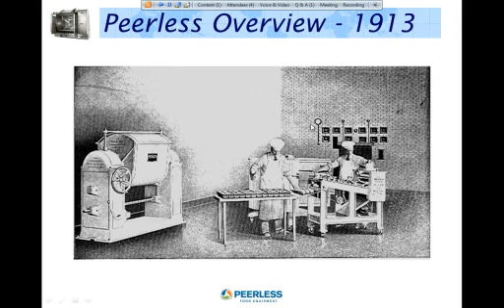Our equipment has changed over the past 100 years. If you're still running the mixer to the left here, congratulations, you have a great maintenance program, but you need to catch up a bit. The design and technology of our equipment has increased considerably over the last 15 years, and the safety standards are constantly being updated. Drive belts have become the new standard over chains, and if you don't have a frequency drive on your mixer, it's becoming outdated quicker than you realize.

With these changes, your maintenance practices will need to be adjusted. Having a Peerless expert on site allows customers to understand and update these practices. It also creates an opportunity to reinforce the training that was originally provided with your equipment.

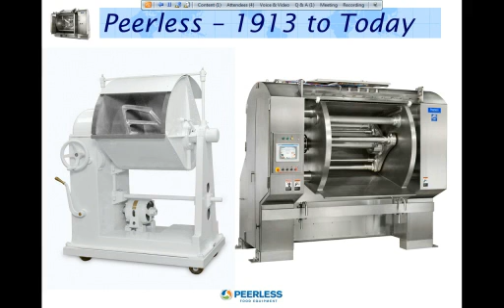Our on-site experts can also use their experience and knowledge to predict and possibly prevent future major mechanical breakdowns, which give you the ability to be more proactive with maintenance schedules. That goes a long way when today's production schedules allow little room for maintenance required to prevent costly downtimes. We will also work with your team to ensure that all safety devices are working as originally designed.

Preventative versus predictive maintenance. Is your current maintenance program reactive or proactive? Most maintenance programs in the baking industry are designed to be more proactive, but with today's production demands, a lot of the scheduled maintenance gets pushed back and sometimes forgotten. This trend will compound over time, and the maintenance team will find that they are being more reactive than proactive. The fact that most maintenance teams seem to be understaffed only adds to this issue.

Can a Peerless PM program help you reduce costly downtimes? The answer is yes. Our experts can determine the current status of your Peerless equipment. We know where to look for the wear points and the problems that are common. We understand the differences in the models and the years manufactured. After all, we built the equipment.

We also look at the history of your machine. We know what upgrades have been added, what parts have been ordered, and what services have been done in the last years. In some cases, the services or parts not ordered give us clues where to look for issues.

Along with the PM contract, there's a lot of benefits that you might not realize. These include reduced rates on parts and discounted services. Plus, you receive priority if emergency services are requested.

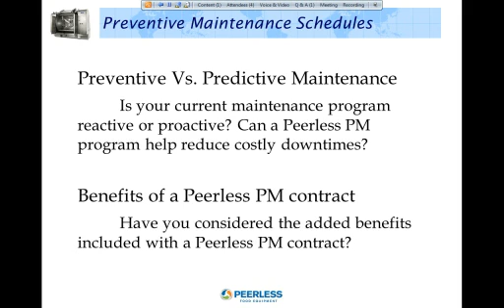Preventative maintenance is generally carried out to prolong the useful working life of machines and is generally based on past experience or manufacturer's recommendation. Wear and tear are two occurrences that nobody can avoid. However well carried out preventative maintenance, your equipment is going to fail someday, but before that, ample warning signs are usually given. These signs are in the form of noise, vibration, or temperature. This is where predictive maintenance comes in.

Basing again on past experience or techniques such as analysis of oil or measurement of wear and so on, mechanics and engineers are able to schedule a shutdown and do repairs before a breakdown that affects your production schedule. Depending on the techniques used, we are often able to predict quite accurately the problem parts and have standby replacements so as to minimize downtime. We can almost guess what kind of services will be required on a mixer from the 90s.

Even if preventative maintenance is being done, there is still wear occurring. Predictive maintenance is a part of preventive maintenance, actually a technique used in preventative maintenance. All are done to prevent unforeseen shutdowns and maximize the working life of machines. Bearings, trunnion rings, bowls, shafts, agitators, belts, chains, motors, reducers, and sprockets are all major parts that will eventually fail. These require detailed inspections, typically not done on regular PMs.

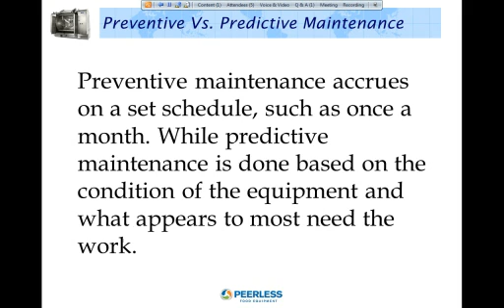Your mechanic may be adding grease every week as required, but may fail to understand where the grease is actually going. A lot of our mixers have central lubrication points located outside the mixer that allows for lubrication without opening the end doors. This is convenient but not always a good way to maintain equipment. I mean, if your mechanic's not opening up the end doors and looking at the tilt mechanisms and the drive components, surprises are going to happen. None of them good.

Another example is automatic lubrication systems. Going in and filling the automatic reservoir is required, but we want your mechanics to inspect the grease lines and look for failures in the lubrication system while they're inside. When was your motor to reducer coupling last inspected? If it's been longer than a month, you're behind schedule and trending towards reactive maintenance.

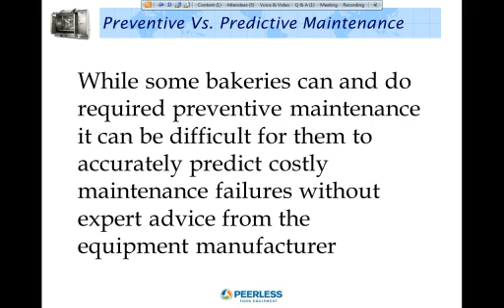A good inspection will require the equipment to be viewed under load. While it's true we cannot interrupt production once a problem is identified, running production tells us a lot about your machine that is hidden when operating empty. Examples are bowl tilting and agitator shaft movement, unusual noises and temperature variations.

Some customers will call up and schedule inspections for down days, which is fine and allows us to review their equipment in detail. But a good inspection will require the machine to be visualized under production. If I'm doing my job correctly, I want to see it under load if possible.

Once an inspection is completed, our technicians file a detailed report listing work completed, any notes they felt were important, parts required, and action items that need to be completed. Half the battle is knowing what needs to be done.

Costly maintenance failures that may be difficult to predict. Bearing heads and trunnion rings. A dry bearing head is a visual indication of a serious lubrication issue. It may be as simple as a sanitation washdown issue or a bigger issue involving failed lubrication system or clogged or broken grease lines.

Hydraulic power units are mostly ignored by maintenance as long as they work. They are a contained system that runs behind the scenes. Oil level and filter must be maintained on these. Gear reducers seldom fail without some indication or signs.

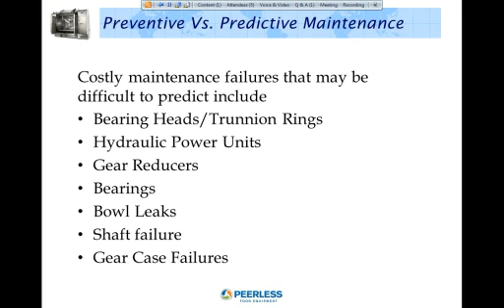Preventative maintenance is required to accurately predict and prevent costly maintenance failures. Here are some examples. Trunnion rings. Last year, we replaced over 10 sets of mixer trunnion rings. This is a costly service that requires the bowl to be removed from the mixer and the frame rebuilt. All of these could have been prevented with our Peerless PM plan.

Refilling lost hydraulic fluid is required at times, but the key is identifying and repairing a leak, and that will in turn prevent damages. Gear case backlash, we talked about that. You can monitor that and record the backlash and then schedule the rebuild. On dividers, I see customers wasting a lot of product due to worn parts. These parts should be replaced for that reason alone. Once a worn part breaks, there's usually more damage, and all that could have been prevented.

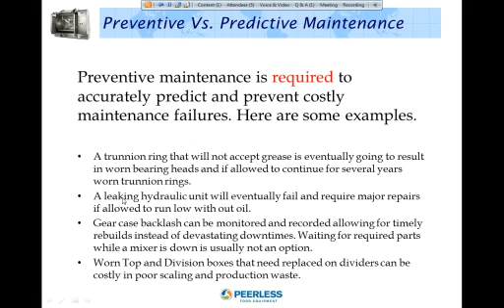While participating in a Peerless PM contract cannot eliminate all failures, it can be a valid tool to help predict major failures before they occur. Preventing one major failure can easily pay for a complete year of PM services. During a recent visit to a customer, we discovered they were forcing water into the bearing cavities during washdowns. This is a common issue with today's power washers that was easily corrected with training. Had this condition been allowed to continue, it would have resulted in costly downtime and emergency bearing repairs.

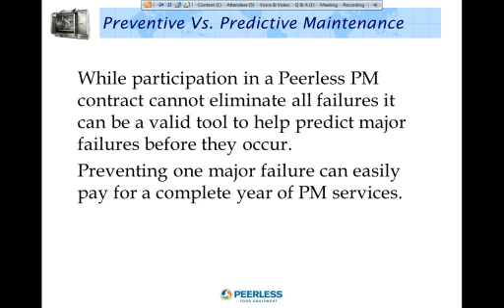We can determine if shaft seals are being properly lubricated and sanitized. A damaged shaft will not seal, and replacing one is costly. Parts, labor, and downtime must be considered. In addition to having a Peerless expert on site to help review your equipment, consider these added advantages. Our customers with PM contracts receive priority when it comes to emergency services. I can think of several instances where we were able to mobilize services within hours when requested by one of our PM contracted customers.

Discount service and parts. Customers also receive a 20% discount on required services identified during our PM process. 20% on a big service like a bearing change or a bowl replacement is substantial. Our PM contract customers receive 5% discounts on parts generated from our PM visits. This works hand in hand with predictive maintenance and scheduling proactive maintenance.

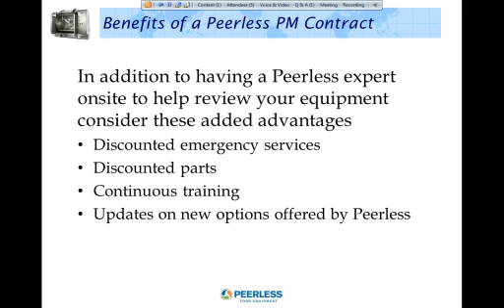Continuous training. Some of our customers experience large turnovers in their maintenance teams. With these experienced personnel leaving, a lot of reinforcement training is required. Having the expert work directly with them is a great way to teach them what to look for. Updates on new options offered by Peerless. Peerless technicians travel all over the world and are familiar with what is currently trending in the baking industry. They can often advise customers on options they may not even be aware exist. Shaft seals, flour gates, cooling options, dough handling options, all have been updated in the last few years.

Prior to a PM visit, our customers are contacted and advised to stock parts required during our PM visit. This helps ensure the parts are installed while we're on site versus getting a list of parts that need to be added later. We can often identify what parts are not being stocked and can advise if stocked items are valid. Customers update equipment, but they seldom reduce obsolete inventory.

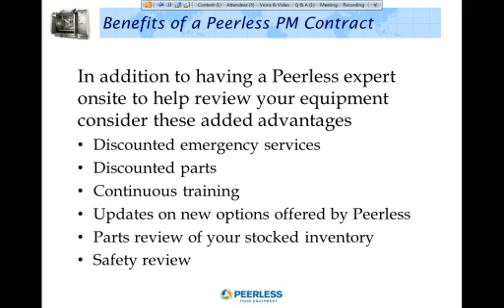Safety review. Peerless technicians will advise customers if Peerless equipment is operated in an unsafe condition. This will reduce accidents and costly liability. In the heat of battle to get equipment running, sometimes safety switches are bypassed and not returned to the safety circuit. We understand how the original safeties were meant to operate and will correct or report any issues with them.

Included in the Preventative Maintenance Program, Peerless Food Equipment will provide the following services. A typical PM visit with the customer will include the following.

We'll conduct an informal opening meeting to discuss a plan for service, and provide the correct person familiar with the equipment. Sometimes schedules get moved at the last minute, and that could be our fault or your fault, but we'll work with you always to get it done on time.

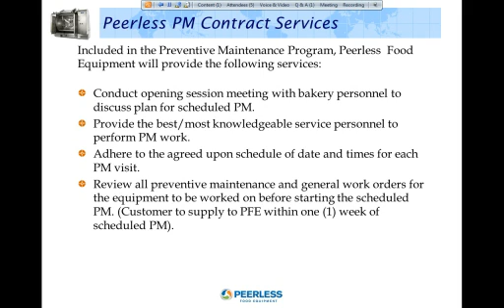Reviewing preventative maintenance work will give the technician a start point and an idea where best to concentrate his efforts while on site.

We compile a list of issues to be investigated during PM, based on PM work. This lists issues and focuses the technician's efforts towards the problem areas. This is a big part of the PM.

You supplying the correct personnel, we're going to work with your bakery personnel to complete the scheduled PM. This is a big part of the PM. Your supplying the correct personnel will ensure the best results.

We'll review issues and create priorities with the maintenance manager for work to be completed. Prioritizing the work orders on needed repairs will continue the efforts once we have left.

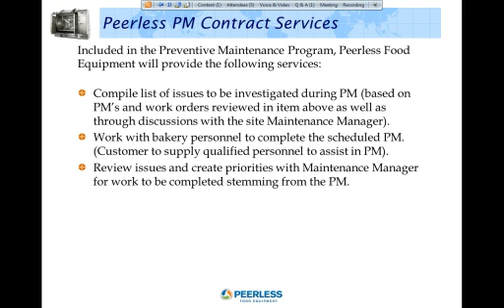Review parts inventory with the maintenance manager. Inventory of parts will keep the wear parts on the shelf. Provide training and machine operating review with personnel from all three shifts. Continuous training will help replace knowledge lost from turnovers.

We'll concentrate on completion of the scheduled PM. What we mean by that is sometimes during a PM we see work that has to be done, and we can get bogged down in that work and not complete the PM. So sometimes we have to pick and choose whether to just write up a work order or to dive in and complete the repair. We have to balance the two.

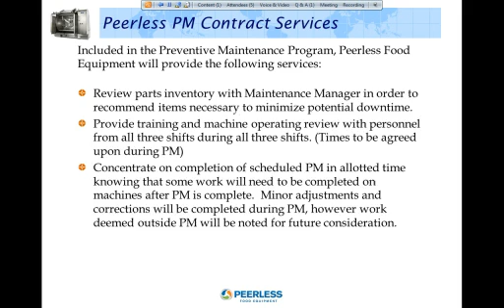If we can't complete the work, we'll write them down, note them, and recommend them for work orders. We'll conduct a closeout meeting and review the results of the PM, and note all major findings. After we return home, we'll send a detailed trip report and issue this to the maintenance manager within a week.

We'll follow up with the maintenance manager. The technician will follow up with a phone call or an email to check for any other issues. And remember, all parts ordered as a result of the PM visit are reduced by 5%, and there's a 20% discount on all Peerless food equipment standard hourly rates.

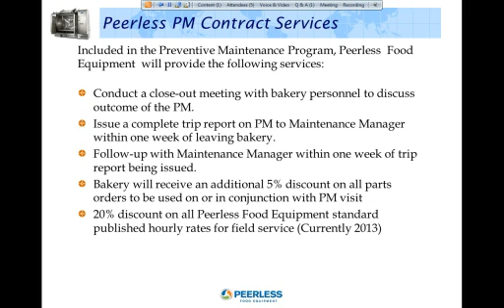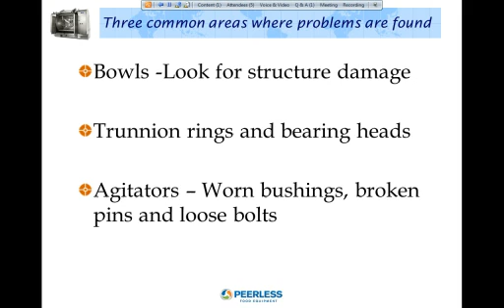Now I want to talk about some areas of the mixers to look for problems. Three common areas where problems are found are your bowls, your trunnion rings and bearing heads, and your agitators. We're going to go through each one in detail, starting with the bowls.

Bowls. You want to look for structure damage on your bowls. Most high-speed bread mixing bowls in the 10 to 20 year age range are going to show evidence of structure damage. Sweet dough mixers tend to hold up a lot better because of what you mix and the lower speeds they mix at.

On all bowls, you want to check all corners and weld seams for cracks. Check around the bowl lips for cracks. Check the bowl spacers and support tubes at the welds. Check the welds around the cold bars, and check your jacket wrapper sheets for cracks.

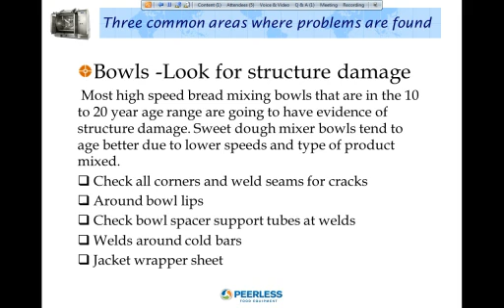Here we've got a couple of photos that show some major structure damage on some bowls. Here's the side of a bowl that's showing a major fracture in it.

Sometimes you'd think they'd be easy to see, and sometimes we point them out to customers and they're shocked that they exist. This one's on the outside base plate, and you can see that this crack goes all the way through. This was at a recent inspection on a customer, and when that mixer was under production, I could feel that crack opening and closing. So they really had worked their bowl over good.

They're going to need some major repairs on that bowl, if not a bowl replacement.

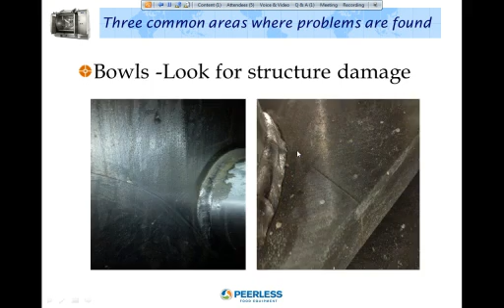Trunnion rings and bearing heads. Here's a bearing head we pulled out of a mixer that was neglected. You can see where the bowl's tilted up and down so many times it's worn a groove in it right up to the mounting bolts. This wasn't necessary. If a lubrication system fails, it needs to be addressed right away.

If your lubrication system's not corrected, this is the kind of wear you're going to receive if you continue to run your mixer. Because they failed to recognize this, it involved replacing the trunnion rings, which is basically removing the bowl and rebuilding the framework.

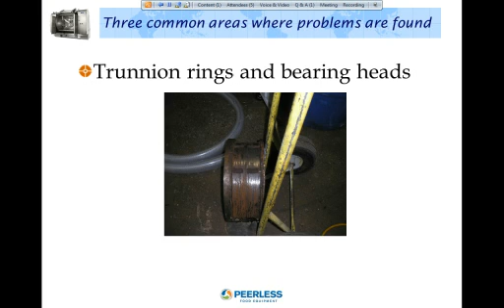Agitators and worn agitators. Worn bushings, broken pins, and loose bolts are common in agitators. You want to go in there and inspect and torque your bolts every month and replace your bolts every year.

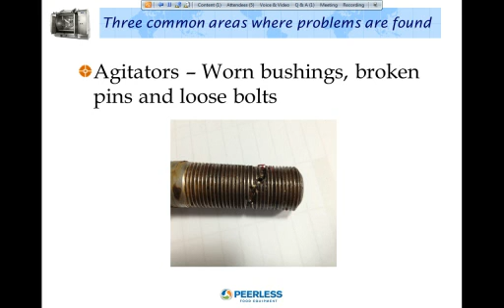In this example here, this bolt has been stretched so much because somebody was improperly torquing it. It's a wonder this bolt didn't come out into the product and cause a serious production or product loss.

Please consider the benefits of a Peerless PM contract. Our service department will be glad to quote a custom PM plan designed for your existing and future equipment.

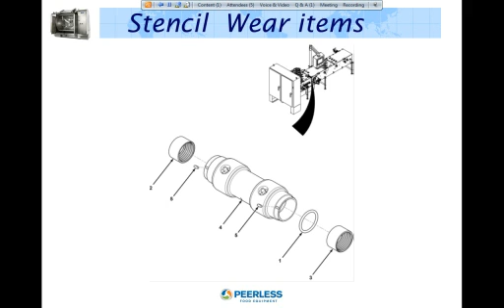Peerless sandwich cleaner. Every cleaning cycle: 1. Disassemble and inspect the stencil assembly for any cracks, worn out seals, wear on the center O-ring. The bronze bushings on the driver and idler hubs should be measured for wear.

1A. Worn helical seals should be replaced as soon as possible because cream will leak out of the stencil ends and into the driver and idler hubs. B. Replace center O-ring at first sign of wear to ensure proper cream balance between lanes.

C. Check the oil seals in the driver and idler hubs for wear. D. Measure the bronze bushings in the driver hub every 90 days to make sure the ID is not out of tolerance. Since the stencil assembly is suspended from these, it is important to replace them when they are out of tolerance to prevent premature seal wear and damage.

2. After washing and drying the stencil assembly, oil the stencil tube, the bronze bushings and seals, and reassemble. Put oil in the threaded oil ports in the stencil hubs. 3. Check cutoff wires for wear and proper tension.

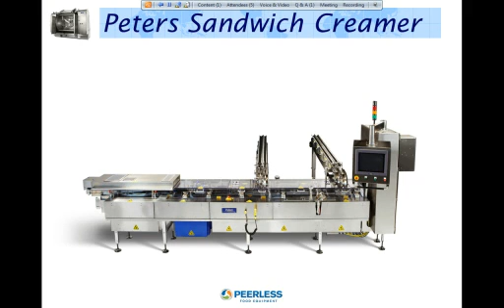Every cleaning cycle, check overhead pin chains for slack and tighten if required. Check overhead pin chains for bent pins and straighten if needed. Check the drive chains under the top cover for slack and tighten if needed. Check spring plungers in the driver hub for wear and replace as needed. Check the drive chains between the PT and QS stacker for slack and tighten as needed.

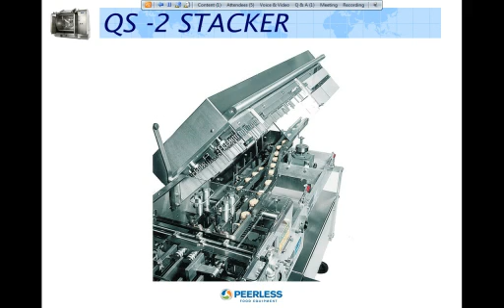QS2 bottom pin chain, every cleaning cycle. Check lower pin chain for slack and tighten if necessary. Inspect the pins for straightness. Check the timing between the lower pin and the upper pin.

They must be in line with each other at the point where the top cookie rail is over the bottom cookie rail. The upper pusher pin should never be in front of the lower pin, or it will crush the cookie. It can be behind, for example, as much as 9 millimeters, so when the lower pin releases the cookie, it will fall back on the top pin.

Oil all chains, and use food grade oil on pin chains. Inspect all chains for wear.

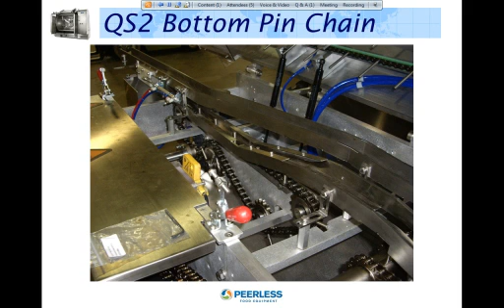Peters creamer hopper. At every cleaning cycle, inspect bottom of tank for leaks. Inspect center cap seals that cover the agitator shaft. Replace O-ring and seals if leaks are detected.

Waukesha pump. The pump must be disassembled and washed. All seals and O-rings inspected and replaced if worn. Refer to the Waukesha pump operation, maintenance, and parts list for removal of the fluid head for cleaning.

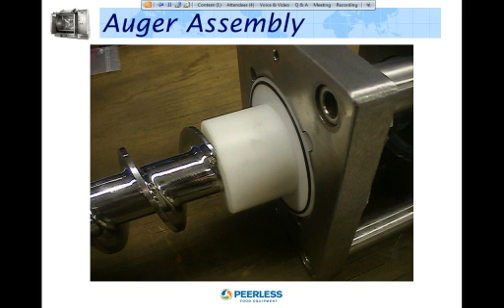Auger assembly. Every cleaning cycle, pull the auger assembly from the hopper. Remove the 4 bolts that keep the auger in place and pull the auger straight out, keeping it as level and on center as possible. After cleaning, inspect the auger helix, silicone auger seal, and O-ring for any damage. Replace worn components as needed or when leaking.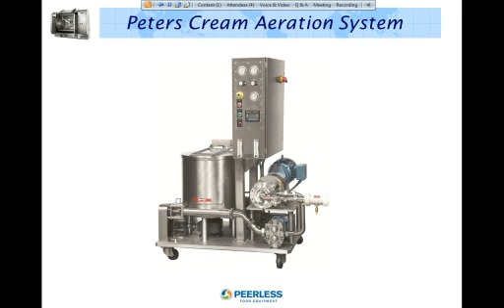Peter's cream aeration system, every cleaning cycle. Follow the same cleaning and maintenance procedure as for the hopper. Remove the front cover of the aeration head and remove the rotor. After all parts have been washed, inspect all seals for wear.

Inspect the back pressure valve for wear. Inspect all fittings, air lines, valves, and regulators for leaks.

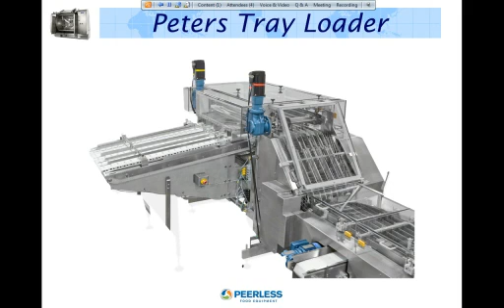Peter's tray loader. Every cleaning cycle, inspect overhead transfer conveyor chains for slack and tension as needed. Inspect overhead transfer conveyor for missing, bent, or out of position pusher pins and repair as needed. Inspect side guide rails for correct position. Inspect counting conveyor flights and rollers for any damage. Inspect all drive chains for slack and tension as needed.

After tightening chains, jog the machine slowly to make sure the counting conveyor flight rollers enter and exit the switch gate without pinching the rollers.

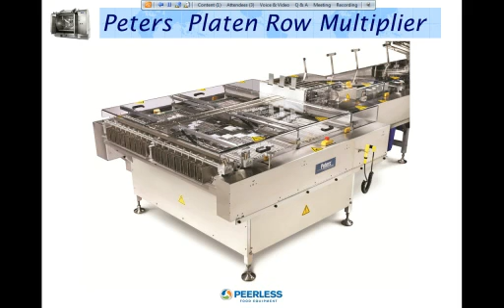Peter's Platen row multiplier. Every cleaning cycle, inspect Platens for damage and missing pusher pins. Inspect Platen carrier rods for any damage, such as nicks and bent rods. Bent rods should be replaced for better performance and so the Platens are not damaged.

Inspect overhead transfer for damaged pins. Inspect all chains for slack and tighten as needed. Check the timing of the overhead transfer from the PT to the Platens.

Jog the machine slowly, making sure the Platen pins do not hit the side guide rails or the slots in the stacking plate at the exit end of the row multiplier. Oil the chains that drive the Platen rods with food grade oil. Oil the Platen carrier rods with food grade oil.

All other chains that are covered by guarding and are not near the product do not need to be oiled with food grade oil. Monthly, check sprockets for wear. Every 3 months, inspect and grease all bearings.

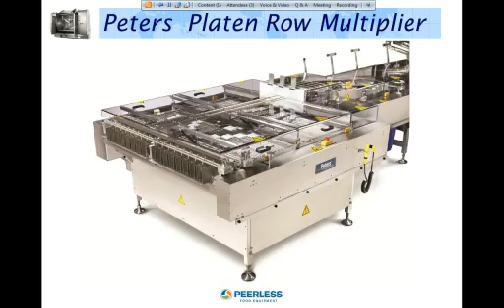Split deposit stencil. The deposit stencil should be cleaned in the same way as a regular stencil. Every time it is washed, the helical seal should be inspected for wear. This stencil has 2 extra O-rings that separate the deposits. They should be inspected and replaced if worn.

Okay, thanks very much, Gus and Pat.